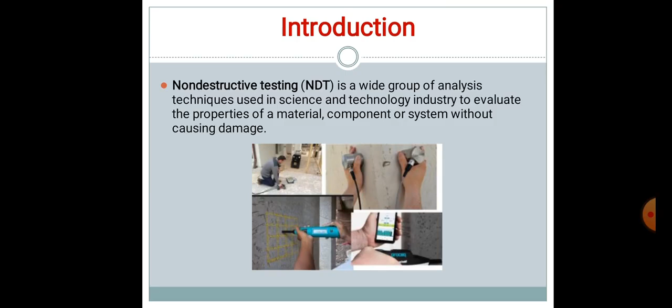In civil engineering applications, this NDT test method is used to examine hardened concrete structures for suitability of use without interfering in any way with the integrity of the material or its suitability for service.

The important non-destructive tests are rebound hammer test, pull-out test, ultrasonic test, and penetration resistance test.

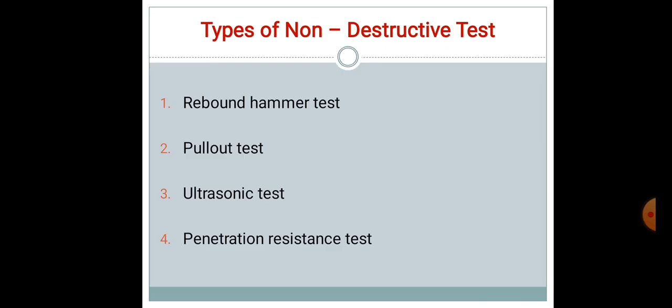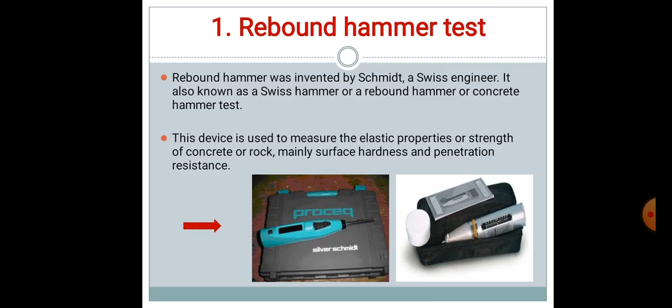Rebound hammer test. The rebound hammer test was invented by a Swiss engineer. It is also known as a Swiss hammer, rebound hammer, or concrete hammer test. This device is used to measure the elastic properties or the strength of concrete or rock, mainly the surface hardness and the penetration resistance.

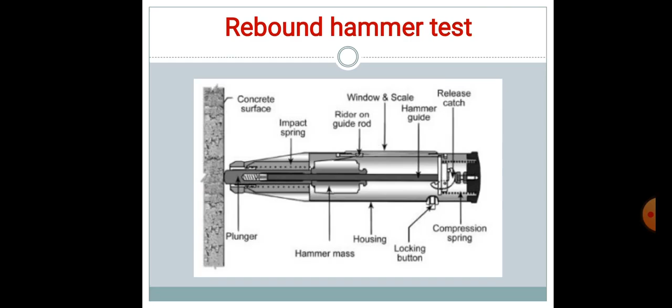The parts of the rebound hammer include the plunger, impact spring, rider on guide rod, window and scale, hammer guide, release catch, hammer mass, housing, locking button and compression spring.

This test can be done in 4 steps. Step A: the instrument is kept ready on the surface of the concrete structure. Step B: the body is pushed towards the testing object on the concrete structure. Step C: the hammer is released. Step D: finally, the hammer plunger rebounds and the reading is taken.

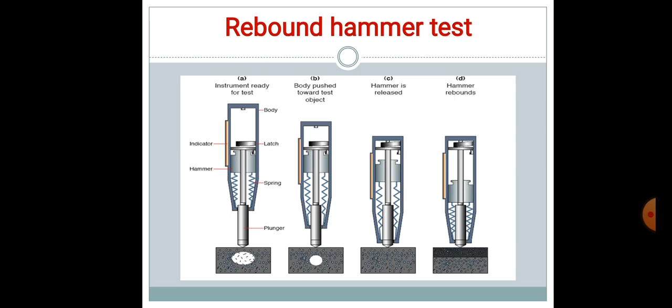This rebound hammer testing can be done in the laboratory and at construction sites. The result of the rebound hammer test depends upon the rebound number.

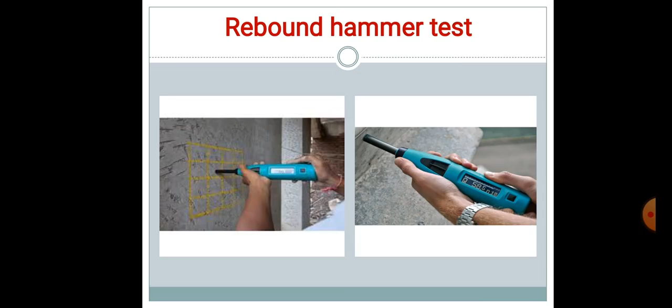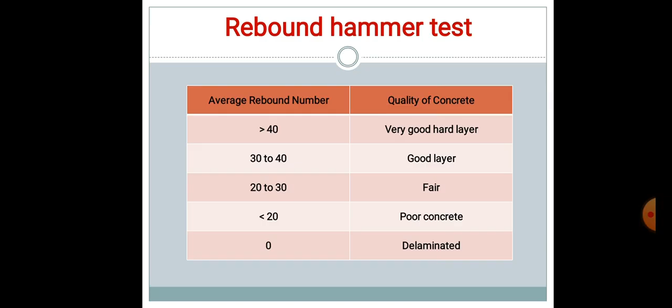If the number is above 40, it is very good hard layer concrete. If the number is 30 to 40, it is good layer concrete. If the number is 20 to 30, it is fair concrete. If the number is below 20, it is poor concrete. If the number is 0, it is delaminated. And hence the rebound hammer test is analyzed.

Pull-out test, also known as concrete pull-out test. It produces a well-defined failure in the concrete and measures the static strength property of concrete. The pull-out test is simple to assemble and an expert operator is not required.

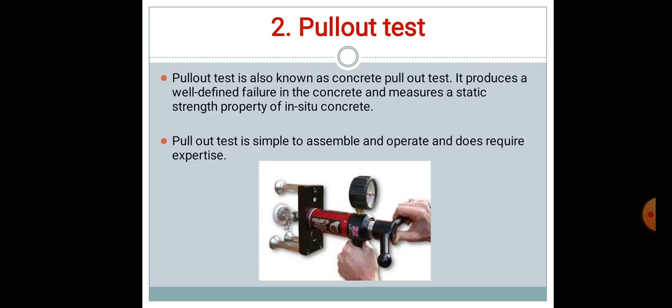This pull-out test is used to determine whether reinforced concrete structures may be placed into service, and to determine the curing of concrete based on target strength achievements.

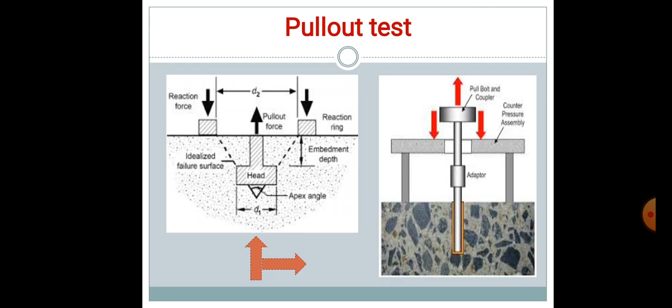The parts of the pull-out equipment include the reaction force, pull-out force, reaction ring, idealized failure surface, embedment depth, apex angle, and head in the middle.

How it works: the pull-out test is achieved by measuring the force required to pull a 25 mm diameter cast-in steel disc. The steel disc is embedded 25 mm in depth in fresh concrete at the time of concreting, and a pull bolt is attached to the steel disc.

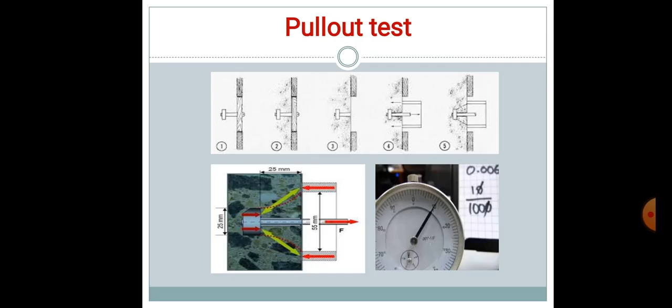After the curing period, the 25 mm steel disc is pulled until failure of the concrete occurs. As the steel is pulled, a rough cone-shaped fragment of concrete is extracted and the pull-out force is measured. The measurement reading is calculated through dial gauges.

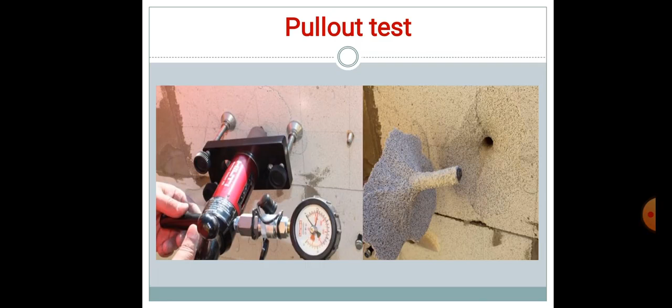This test is carried out for early strength estimations and to find out the compressive strength with the help of a calibration curve.

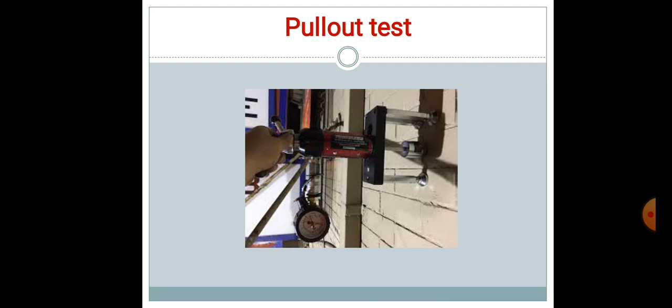This test is based on laboratory and field tests conducted on concrete cubes and pull-out samples, and hence the pull-out test is famous and used to evaluate the structure for early strength.

Ultrasonic test. Ultrasonic test is one of the non-destructive test methods based on the transmission of ultrasonic pulses in components of material like concrete, steel, etc. Ultrasonic testing is known as UT, or ultrasonic pulse velocity test, UPV test.

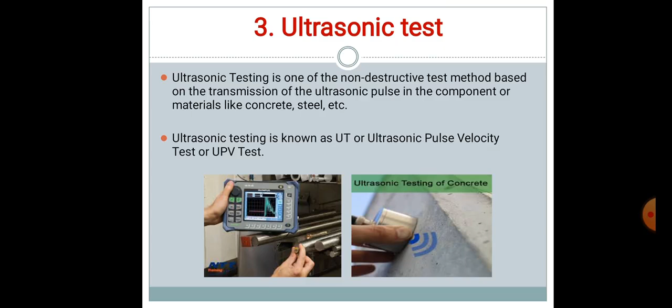Ultrasonic testing method is based on the use of equipment composed of transducers which produce and receive the ultrasonic wave of 0.01 to 60 MHz.

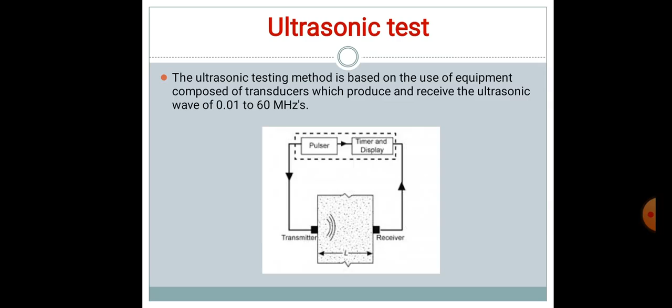The pulse wave depends upon the density and the elastic property of materials of RCC structures. It also provides information about the identification of corrosion-prone locations, depending upon the results of ultrasonic testing.

Ultrasonic pulse or wave is produced and received by an electroacoustical transducer. This transducer is held in contact with one surface of the concrete, and a similar receiving transducer is held in contact with the surface at another end.

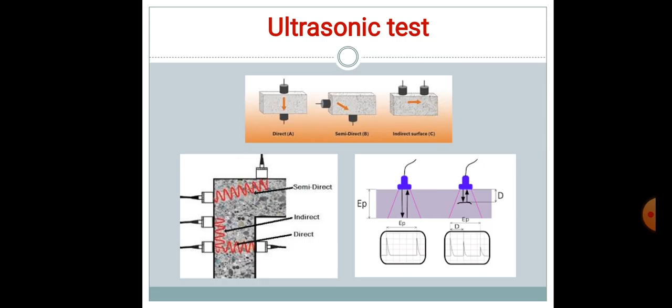Once the distance between two probes, the path length, and the travel time is known, it is possible to determine the average pulse velocity by the following equation. The higher pulse velocity indicates higher elastic modulus, density and integrity of concrete. The pulse velocity also depends upon the method of propagation, the arrangement, and the transducers.

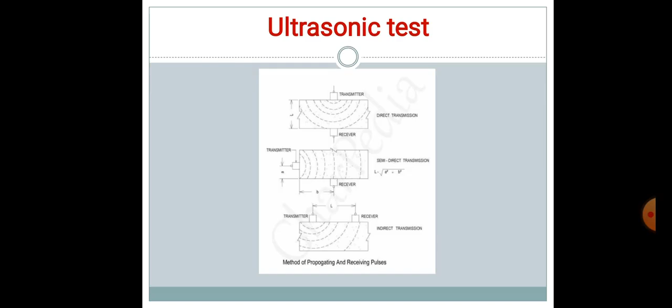The pulse velocity does not directly measure the compressive strength, and the compressive strength of concrete is influenced by many variables, including the type of aggregate, age, moisture content, and mix proportion of concrete.

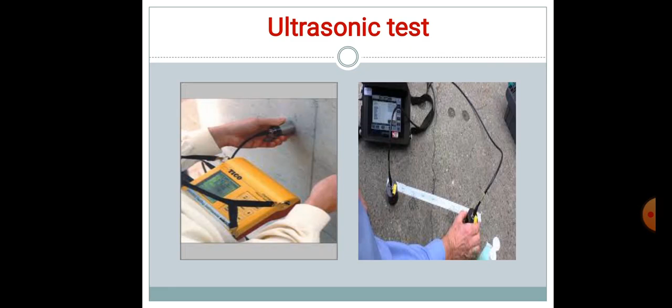The result of the ultrasonic test depends upon the pulse velocity in km per second. If the pulse velocity is above 4.0, it is very good to excellent. If it is 3.5 to 4.0, it is good to very good and may exist.

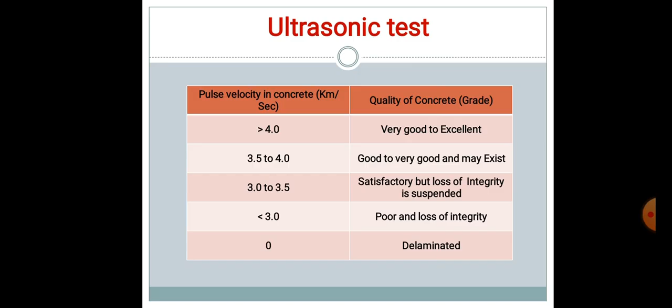If it is 3.0 to 3.5, it is satisfactory but loss of integrity is suspected. If it is below 3.0, it is poor with loss of integrity. If it is 0, it is delaminated, and hence the ultrasonic test is analyzed.

Penetration resistance test. The penetration resistance test determines the relative strength of concrete in the structure. It estimates the strength of concrete from the depth of penetration of a steel rod.

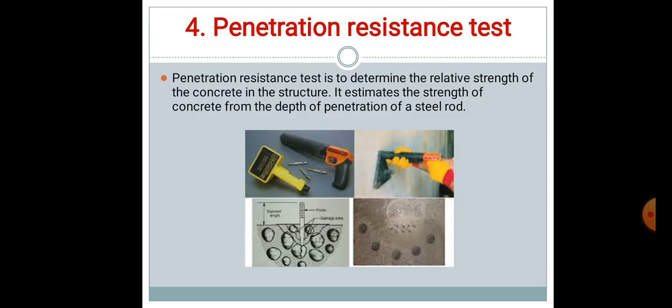In this method, a steel rod or steel probe is fired into the concrete surface by sudden explosion. The Windsor probe equipment is a famous penetration resistance measurement equipment for concrete.

The technique consists of accessories like a gunpowder actuated driver, and a hardened alloy rod probe. It also consists of accessories like loaded cartridges and depth gauges, etc.

The depth of penetration depends upon the strength of concrete, and it is fired closely, and a set of 3 average values is estimated and the strength of concrete is determined.

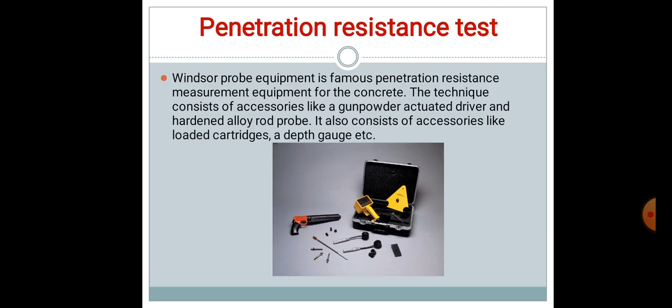How it works: this test can be done in 5 steps. Step 1: provide a minimum 150 mm edge distance from the surface of the member. Step 2: the minimum thickness required for the member is 150 mm.

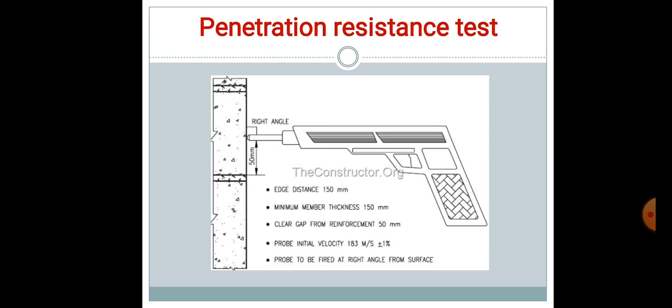Step 3: leave a 50 mm clear gap from the reinforcement present in the member, since reinforcing bars may be present within the zone. Step 4: provide an initial velocity of 183 meters per second to the probe, with a 1% allowable difference in velocity. Step 5: the probe is to be fired at right angles from the surface.

The pin is removed from the hole and the hole is cleaned with an air jet. The depth of the hole is measured using suitable depth gauges. And hence the penetration resistance is analyzed.

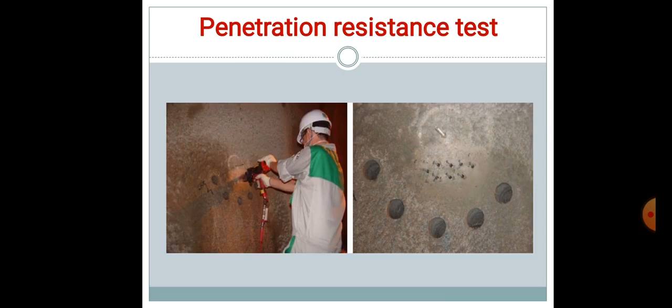Non-destructive tests are widely used and play a major role in civil engineering projects, including newly constructed and existing structures — for new structure applications, mainly for quality control, or to resolve doubts about the quality of materials or construction.